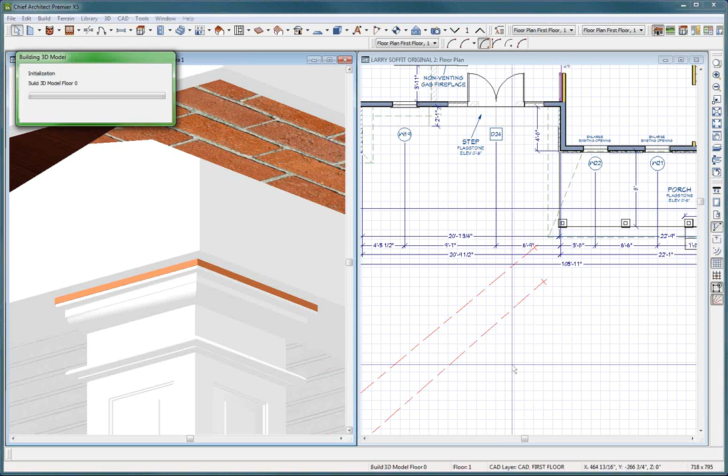Larry's got a house right here, and if I were to take an overview of it, here's the issue. He's got a roof plane here and a roof plane here. This is a 5 and 12 pitch, and this is a 2 and 12 pitch, so it's not a 45-degree angle. On both of these roofs, he has a soffit defined - soffit boxed eave, which is a flat soffit and default overhang. So let's take a look at the underside of this thing and see what's going on.

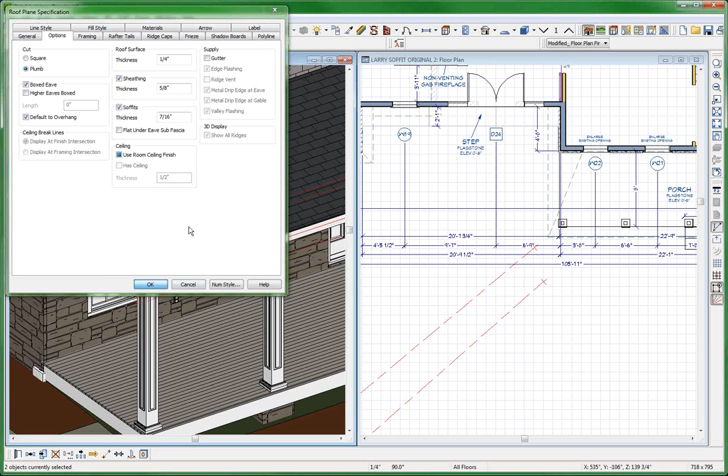There's an issue here that Larry had. This is the second time I'm doing this video - the first time it was a complete failure until I went to Taco Bell and ordered a couple of crispy tacos al fresco, and it came to me. The solution came to me.

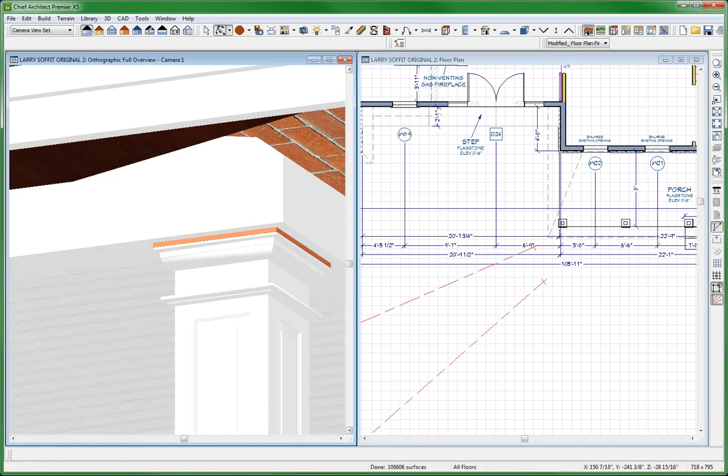Here it is right here, and I've changed the materials of the soffit to brick and this other material so you can see what's happening. If you look closely, you can see that this brick soffit here doesn't flow back into this soffit here.

And why is that? That's because he's got this defined as a tab U option soffit. He has it defaulted to the overhang, which is a 12-inch overhang or whatever it is. Well, don't default to the overhang - change it to 30 or whatever you want it to be.

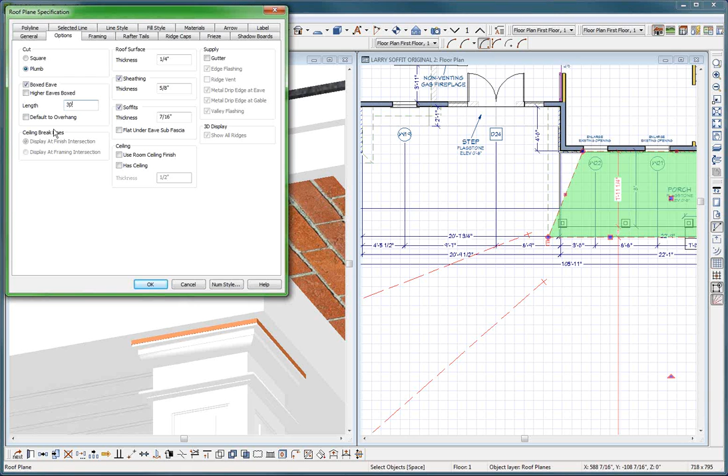Now watch what happens. Watch this soffit, tick, tick, tick - the soffit will now merge with the other soffit. In fact, I'm going to change it from 30 to 18 to show you the difference. Watch this - it all melds together. Yeah, see? Now it looks like a real good soffit.

So now I'm going to change it - instead of a 30-inch soffit, I think I blew it up. I'm going to make it an 18-inch soffit. I'm not sure what his overhang is, and I think you're going to see that it doesn't quite meet the brick soffit.

Watch this, tick, tick, tick, tick, tick, tick. Yeah, see, it stopped right there. So you've got to make the soffit bigger.

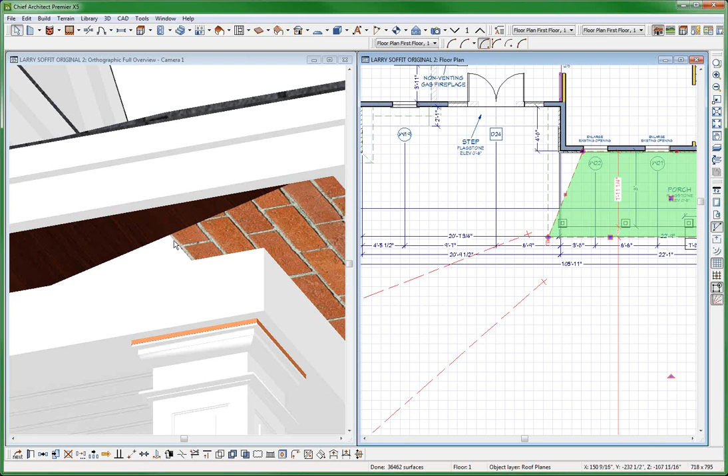So let's just - cancel. Oh, I messed up. Sorry, shift J. Let's look at the soffit one more time and let's change it. Oh Larry, this plan is just so slow - I feel like I'm shooting myself in the head with this mess.

I'm not sure how big it should be, so let's just see. I think it should go 30 inches - is that 30? You think that's 30 inches? Maybe it's 36 inches. So I'm going to change this to a 36-inch tab U soffit, not defaulting into the overhang - 36. And now you're going to see it just melds in pretty darn good.

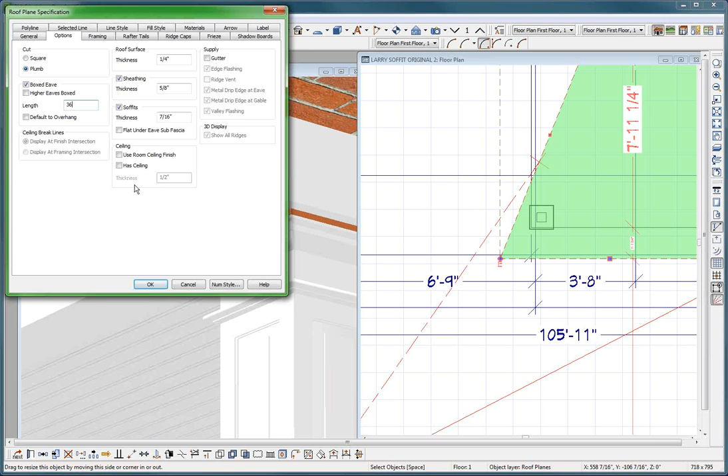Now, I'm not even sure if I want to know how it affects everything else. Oh, I can't - there it is. It's fixed. I mean, it's fixed, Larry. You've got to change your soffit.

Let's just see what happens here as far as this goes. Let's cut a section through here, see if it's really screwed up. Maybe it is - maybe this is really screwed up. Yeah, see, the soffit goes back into this here, and maybe, I don't know, live with it - it's technically not correct. You can understand that, right?

See, this soffit goes back into here, but it's going to be hidden by your ceiling, I guess, because I think you got a ceiling plane in here. If I come back here and change this roof here to the U options to default to overhang, which will be 12 inches or whatever your overhang is, you're going to see that this soffit right here does not go back into that.

So it's sort of a fix - it fixes it on the outside visually, but the section might not be perfect. Yeah, see what happened. That's what happened. And now you actually got drywall here, Larry.

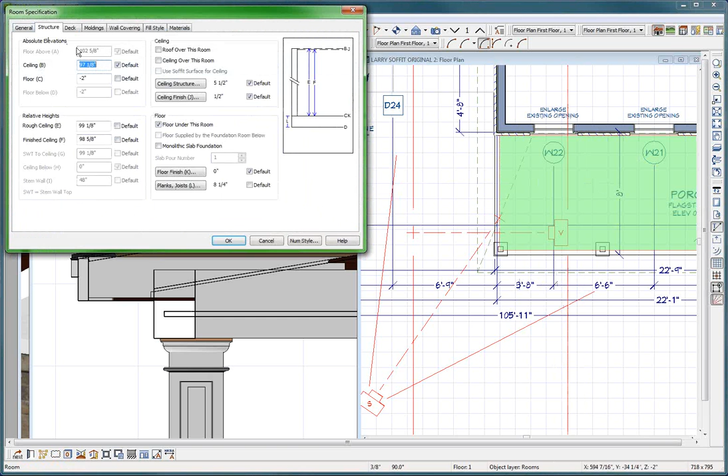So I think you need to go under options, and I don't know why - because you probably have this defined as structure. Do I have a ceiling over? I don't know. How'd you build your ceiling, man?

Structure, ceiling structure. I don't know what you did. Why do I have a material on that thing right there? And what did you create, a piece solid right there? Is that what you did, Larry? Come on, man. You don't have a ceiling on this, do you? Well, I'm gonna give you a roof. I'm gonna give you a ceiling. I don't know what's gonna happen now.

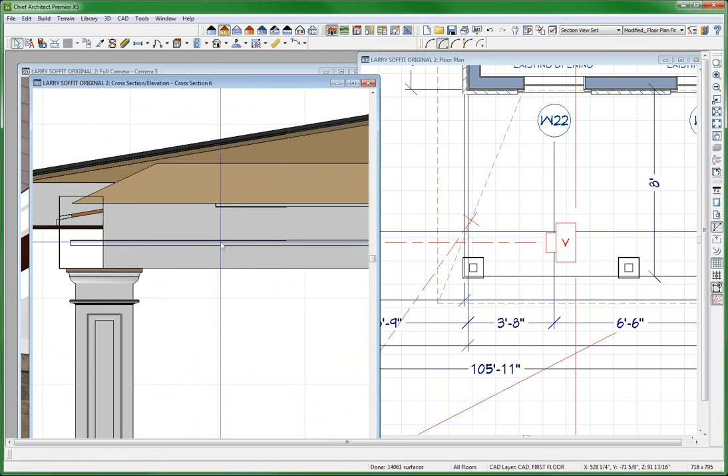Check. Check that out, I just got rid of something. Well, I got my ceiling coming to this point here. I don't know why. I don't know what this is, man. Did you put a ceiling, a soffit in there or something? I don't know, but you figure it out. Bottom line is, I think I fixed one.

Oh, I hate this. What did you do? Did you have a ceiling in here, man? Did you put a ceiling in there? Did you put your own fake ceiling in there? Hang on a second. Escape.

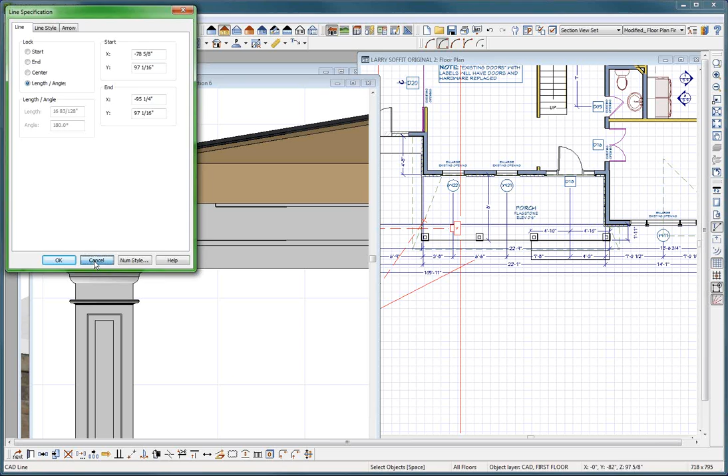I think I want your ceiling to be at W right there. What's that elevation at? Y. 97 1/16. So this ceiling needs to be at Y. Rough ceiling, 97 1/8 or whatever it is. And so now I bet it gets fixed. Maybe.

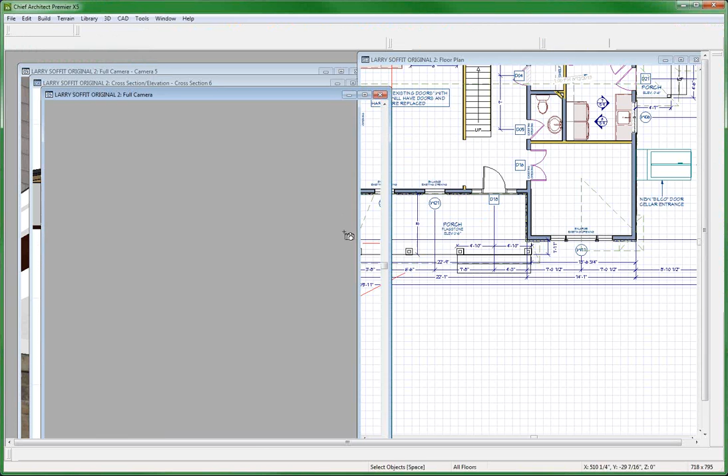Yeah, see, that might mess up your soffit that I proposed. Yeah, see, now you must have put some kind of a ceiling in this thing, Larry. Let's take a look at this right here. I think you put a ceiling in here of some sort, a piece solid or something. I think that's what you did. Hang on a second. Oh, you put a ceiling plane in there. Well, I don't know why you put a ceiling plane. Maybe if you want a ceiling plane, you can put one in.

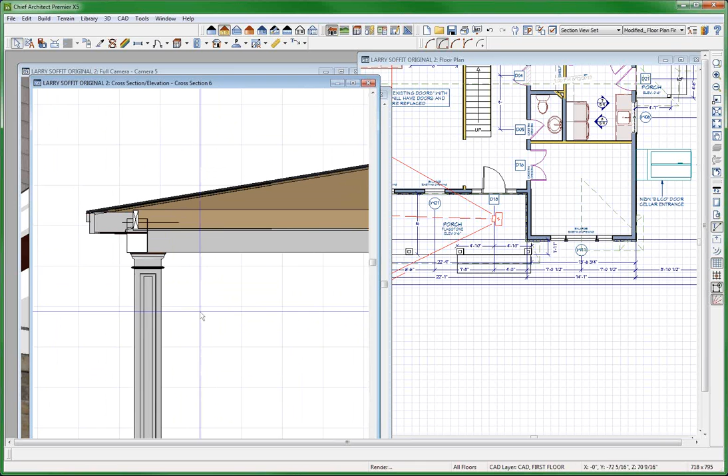I'm going to get rid of it, though. Yeah, I got rid of the ceiling plane. Yeah, I got rid of your ceiling plane. You dropped it down, but I think you do this right here. And now let's go back and let's see if this causes a problem with your soffit.

Remember, that's what I was afraid of actually, is that you change this. Since you were going to drop the ceiling down, this isn't going to matter. But if I don't want to default to the overhang, I want to make it 30 inches. I bet that soffit... well heck, you should just make your... watch this, the soffit's going to come in. Oh, it didn't come in, Larry.

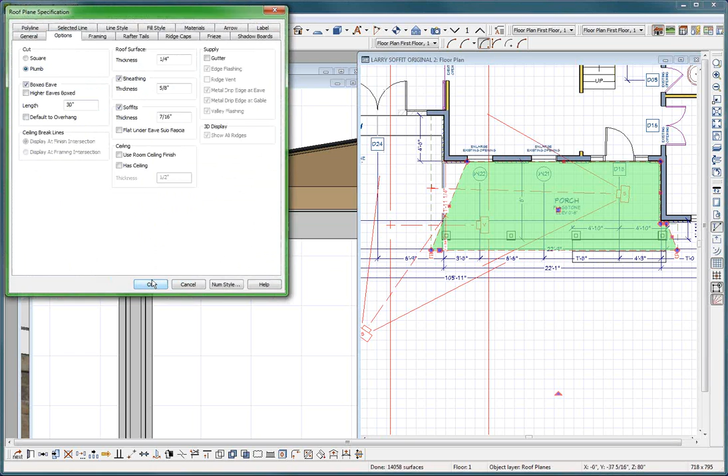Check that out. Yeah, I mean, I'm using the soffit that I... in fact, oh God, I just can't stand this when it takes so long to do this. Hang on a second, let me see if I fixed your... yeah, that thing's still fixed, and I made it a 30-inch soffit, but it's not being affected because I have a ceiling in here.

You got what I'm saying? And now I really want my ceiling W to be right at that level there. So if I come in here, U, cancel, W, the ceiling is right there. No, the ceiling is right there. Take this, Y, 94 inches. That's where I want my ceiling at. Control C, cancel, go back to here. Y, ceiling at 94. Now it's all going to be hunky-dory.

It's just a way of working it out. Watch this, now the ceiling and the soffit's the same elevation, if that's what you want. If you don't want it, watch this. Oh, well, that didn't work out very well, did it? Hang on a second. Y, 94, cancel.

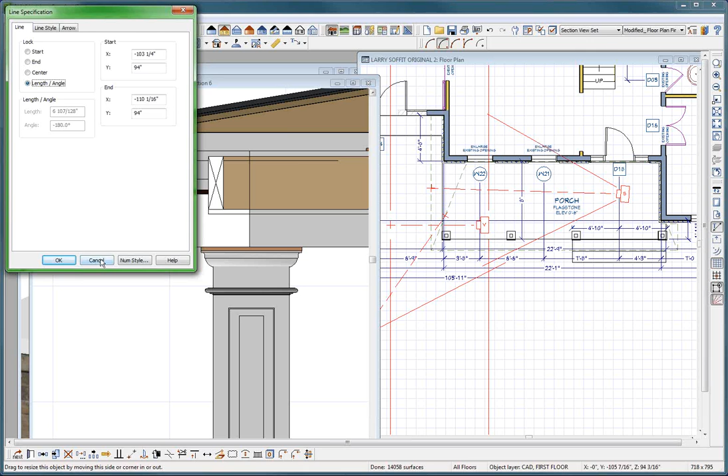Oh, I know what I did wrong. Y, it's the absolute. I chose relative, but it should be absolute, 94. Now it's all gonna plane in. You got what I'm saying? It's all gonna plane in. And you just pick out wherever you want your ceiling.

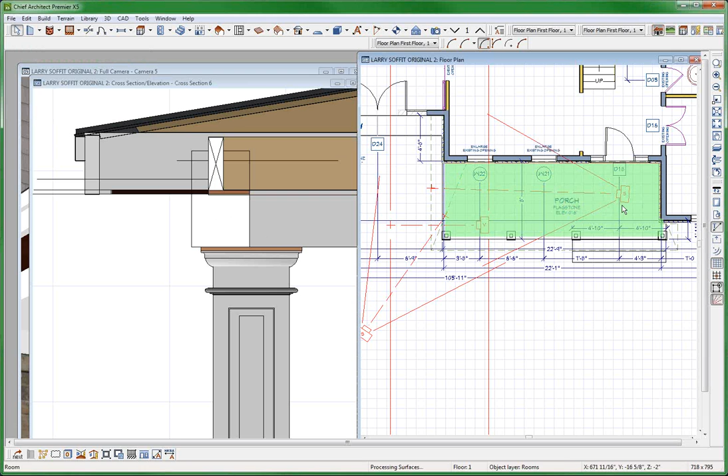Watch this. Yep, there it is. And if you look at it underneath, it should be hunky dory. Yeah, I guess that's hunky dory, huh? Oh, I don't think you have your beam shown or something. I guess you have a beam in there, so I don't see it. Screw it, you figure it out. But anyway, we got it worked out. Thanks, Larry, for the question. Nice question, nice exercise. Thank you.